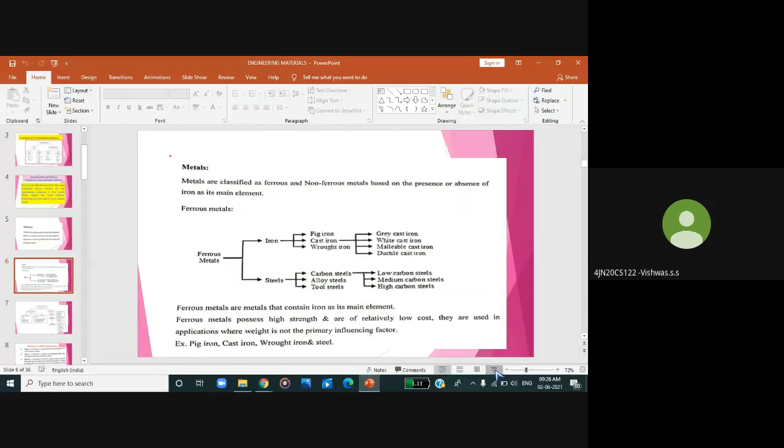Last class we discussed the types of metals. Metals are classified broadly into ferrous and non-ferrous. In ferrous metals, the broad classification is iron and steel. In iron you have cast iron, pig iron, wrought iron. In steel, carbon steel, alloy steel, tool steel.

There is further sub-classification. Cast irons are classified into gray cast iron, white cast iron, malleable cast iron, ductile iron. Carbon steels are used for tools in our house, industry and machine shop, manufactured from low carbon steel. Tools like hammer and chisel are made from medium or high carbon steel. The anvil in the workshop is made from high carbon steel. And there is alloy steel, tool steel, like this. This is the broad classification of ferrous metals.

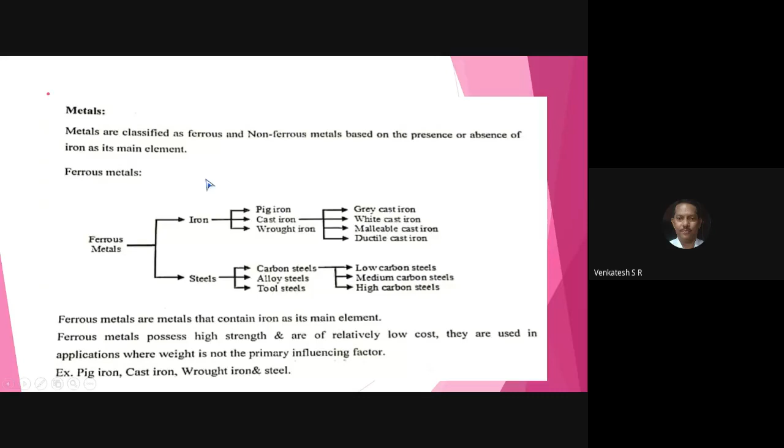We already studied that engineering materials are classified into metals, alloys, and non-metals, along with the properties of metals. We discussed 5 properties yesterday.

I start from number 6, brittleness. What is the property of brittleness? It is nothing but the property of the material that is exactly opposite to ductility. Ductility is the enablement to make the wire, but if the metal has brittleness, then you cannot draw or pull the metal. If you drop it, there will be a crack or break. So brittleness is a property of materials you cannot observe directly like ductility — it is nothing but the breaking of material.

A good example of brittleness: cast iron, bronze, and concrete. These three are good examples for brittleness.

Now write down number 6, brittleness. Underline that, put a colon and hyphen. Brittleness is the property of the material opposite to the ductility. It is the property of breaking the material with little permanent distortion. Next line, write down example: cast iron, bronze, concrete, etc.

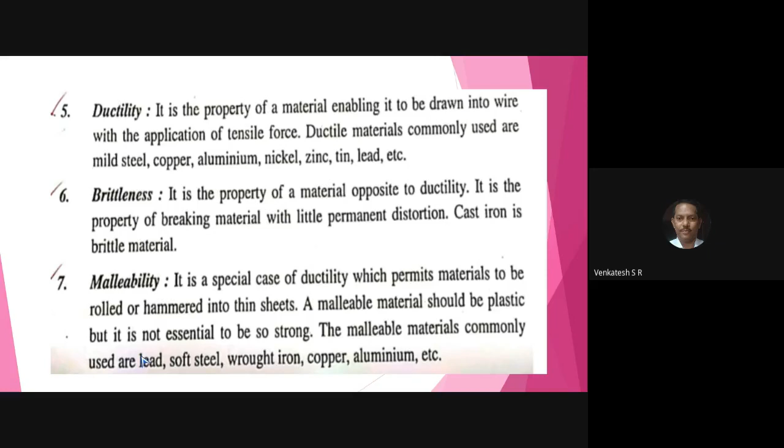Next, write down property number 8, toughness. Underline that, put a colon and hyphen. Toughness is the property of a material to resist fracture due to high impact loads or hammer blows.

If you hammer a component made from brittle material, ductile metal, or any metal, and observe fracture, then you can say the metal has less toughness. If it resists the hammer blows or impact load, then the toughness of the material is high.

Next, you write down number 9, resilience.

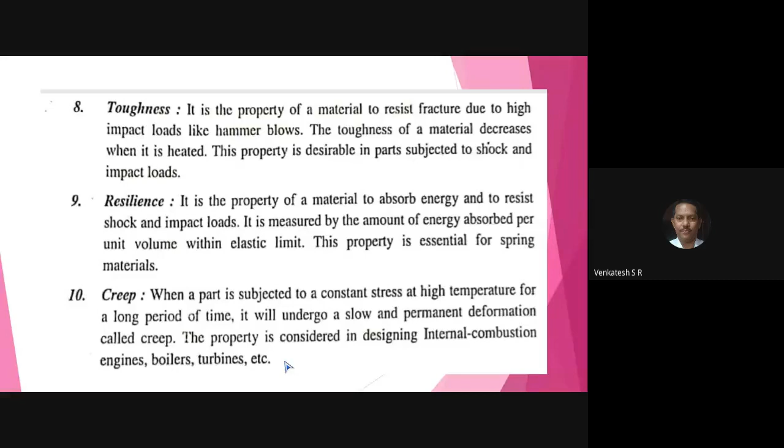Results of the test are used for the calculation of life of the component.

Next, write down number 11, fatigue. Underline that, put a colon and hyphen. Fatigue is the repeated loading of the component, or cyclic loading of the component. The component is loaded cyclically or with repeated load - is it possible to withstand the load or not? That is fatigue.

For example, I ask you to walk in one direction for 25 meters. All of a sudden, I ask you to change the direction of walking in the opposite direction. You feel little fatigue or difficulty in walking in the opposite direction - that is nothing but fatigue.

Underline that, put a colon and hyphen. When a material is subjected to repeated stresses or cyclic loading, it fails at stresses below the yield point stresses.

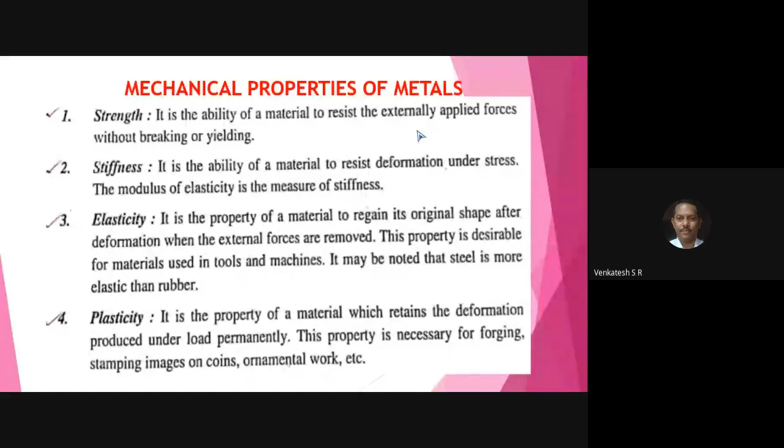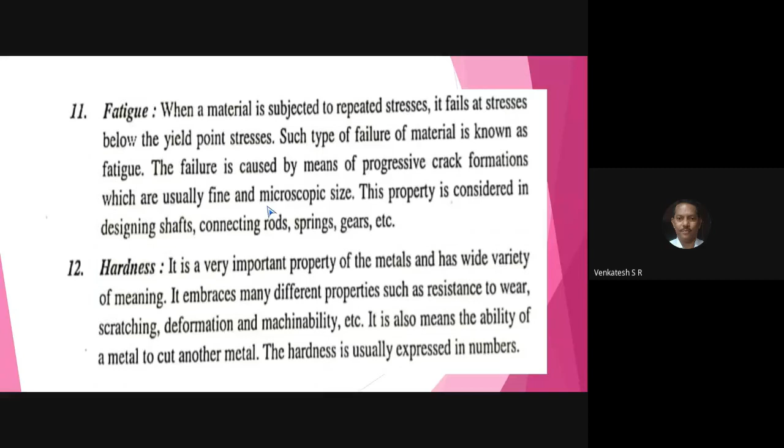Next, you write down ferrous alloys. Underline that. In Latin, iron is known as ferrum, and its chemical designation is Fe. Fe, full stop. Next paragraph, write down.

Ferrous metals are basically iron-based metals or contain iron as their main constituent, with some alloying elements like chromium, tungsten, nickel,

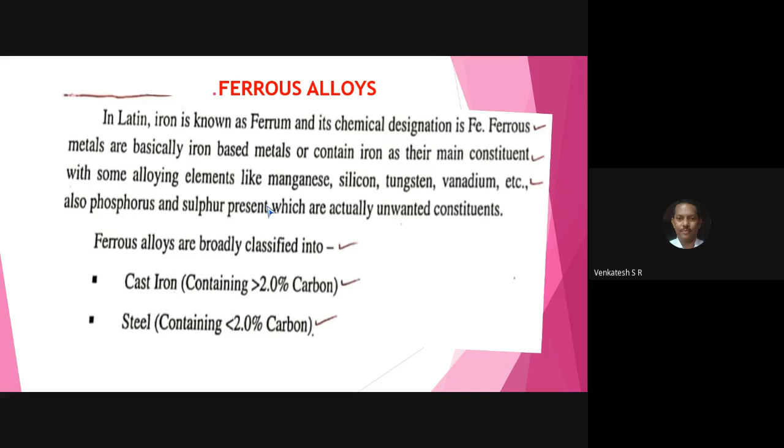Next, write down. Write it fast. Classification of ferrous alloys. Number one, cast iron containing greater than 2% of carbon. Close the bracket. Write down subdivisions one by one. Subdivision A, grey cast iron. Here I made a mistake. Grey cast iron.

Subdivision B, malleable cast iron. Yesterday I told you the SG iron or nodular iron. All of you see the nodules. The same type of structure is present in the iron. It is called nodular iron or SG iron or ductile iron. Subdivision C, write down nodular iron or SG iron or ductile iron. Next line, write down subdivision D, white cast iron.

White cast iron. Subdivision E, you leave chilled cast iron and mottled cast iron. No need these two. You write down E, alloy cast iron. Next, you write down number two, classification number two, steel in bracket, write down containing less than 2% of carbon. Subdivision A, plain carbon steel.

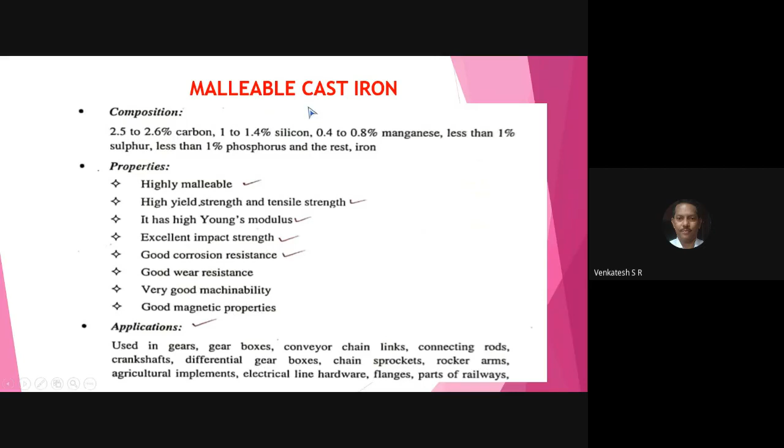Write down composition. Next, number 2, properties. Number 3, applications. Malleable cast iron has a number of applications and a number of properties, and clearly write the composition. Write down malleable cast iron.

Next, come to the point, spheroidal graphite iron. In brackets, write down SG iron. This is very, very important for engineers because we expect long life in components, and if the component is made from spheroidal graphite iron, then you have more life. This is very, very important. Mark it, all of you. Number 1, write down composition.

3.2 to 4% carbon, 1.8 to 3% silicon, 0.25 to 0.5% manganese, 0.08% maximum sulfur, 0.01% maximum phosphorus, and the rest iron.

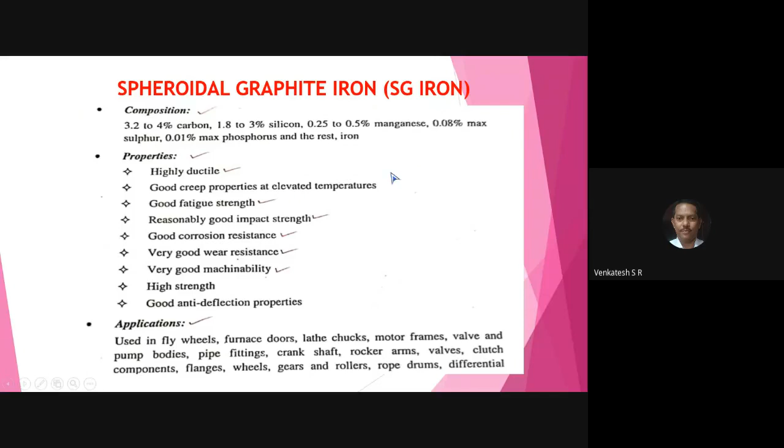All of you observe here, a lot of properties are present. Remember any 5 or 6 properties and write them in the examination. The metal is ductile, has impact strength, corrosion resistance, wear resistance, machinability, and other properties. After completion of this topic, make the common 5 or 6 properties and 6 to 7 common applications. Write down spheroidal graphite iron, SG iron. Next, come to the point, low carbon steel.

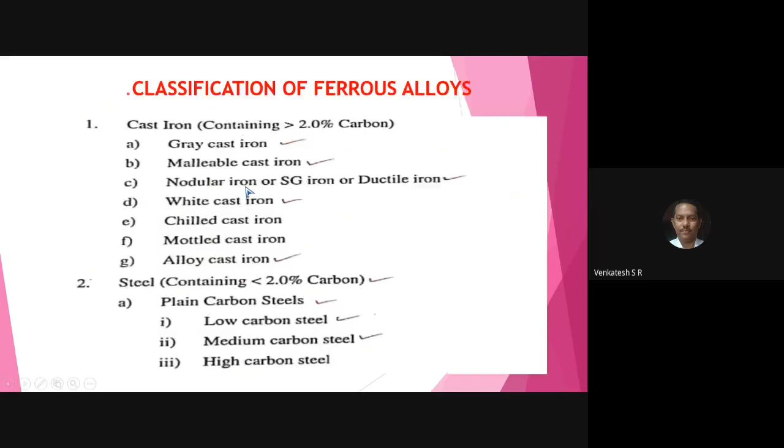Low carbon steel. Write down up to 0.25% carbon, comma. See, the carbon percentage is less, 0.25%, for that reason it is called low carbon steel.

Next you write down carbon, only the name is enough: carbon, chromium, tungsten, molybdenum, vanadium, nickel, and remaining iron.

Number 1, composition. Number 2, properties. Number 3, applications. Next you write down medium carbon steel. First, number 1, composition: from 0.25 to 0.55% carbon.

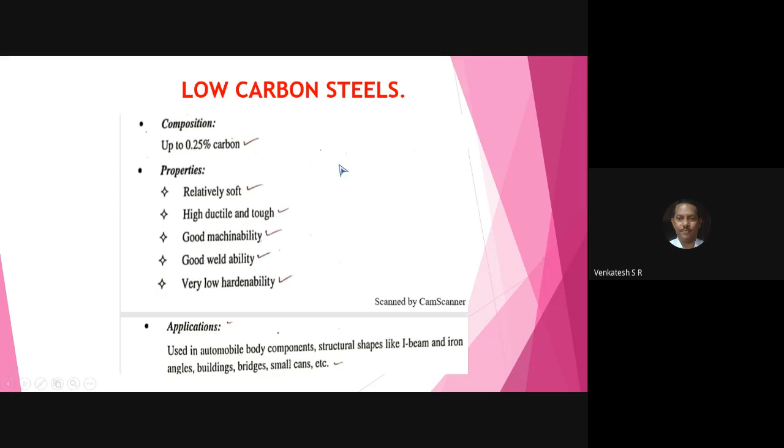Next, medium carbon steel, which has the medium percentage of carbon, that is, ranges from 0.25 to 0.55% carbon, comma, chromium, tungsten, molybdenum, vanadium, nickel. In bracket, write down: all the alloying elements present in medium carbon steel, which ranges from 2 to 12%, and remaining iron.

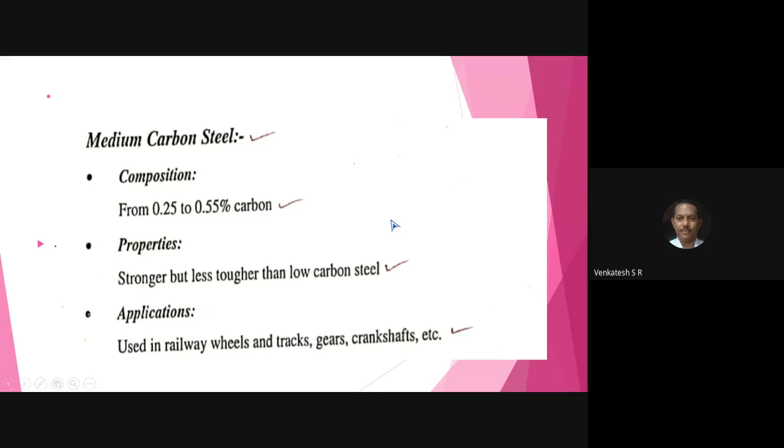Next, come to the point: high carbon steel. Write down the word high carbon steel. Underline that. Number 1, composition, which has from 0.55 up to 2.1% carbon. Chromium, tungsten, vanadium, molybdenum, nickel are present. In bracket, write down 2 to 18%. Close the bracket.

Next, number 2, properties. High carbon steels are very, very tough, hard, and used in manufacturing of tools. All of you observe here: knives, razors, scissors, blades, and single point cutting tools used in the machine tools. That's number 3, application.